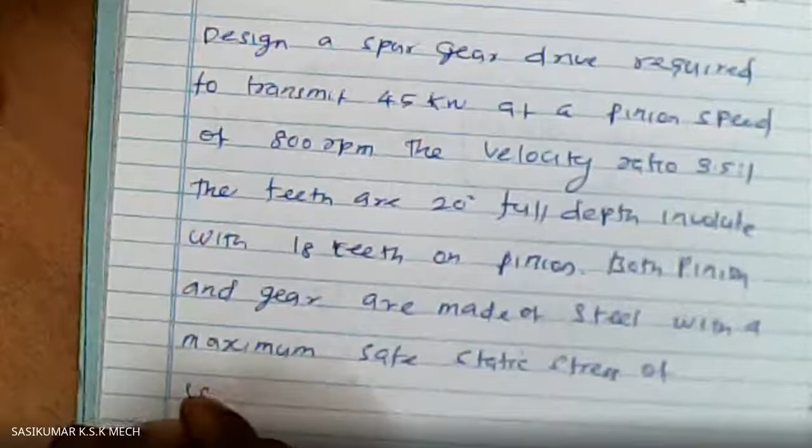Both pinion and gear are made of steel with a maximum safe static stress of 180 Newton per mm square. So this you can solve either by the previous method or this method also. So if specifically asked, you can use that method. Otherwise, whichever is convenient to you, you can use that.

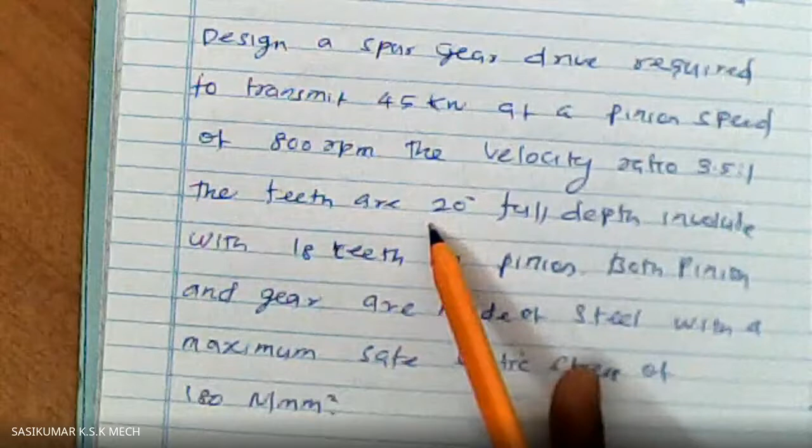So the problem is like this: design a Spur gear drive required to transmit 45 kilowatt at a pinion speed of 800 rpm. The velocity ratio is 3.5 is to 1. The teeth are 20-degree full depth involute with 18 teeth on the pinion. Both pinion and gear are made up of steel with a maximum safe static stress of 180 Newton per mm square.

Here both wheel and pinion and gear are made up of the same material.

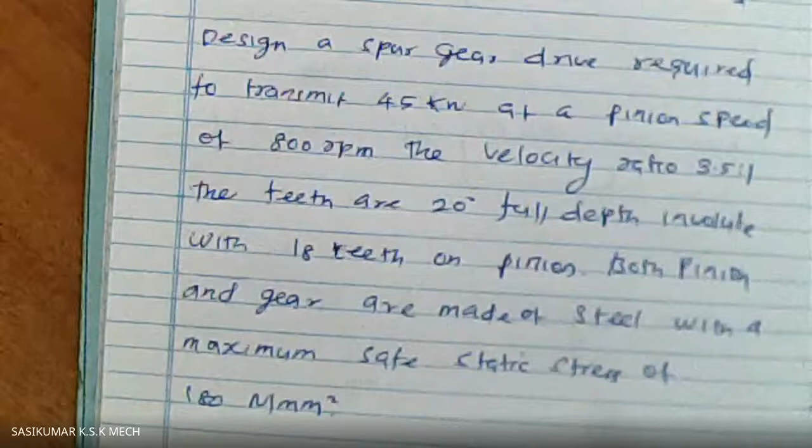So first of all, we'll write the given thing. So, given data.

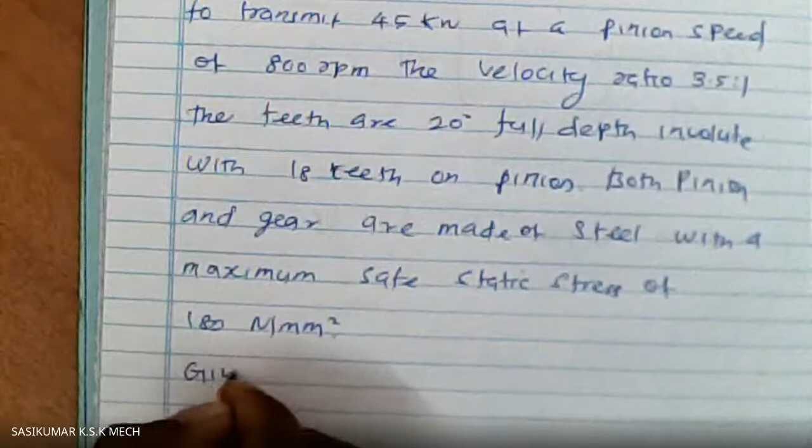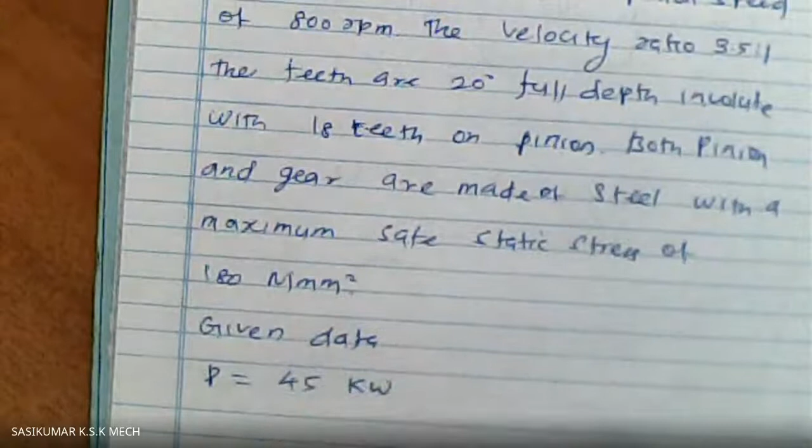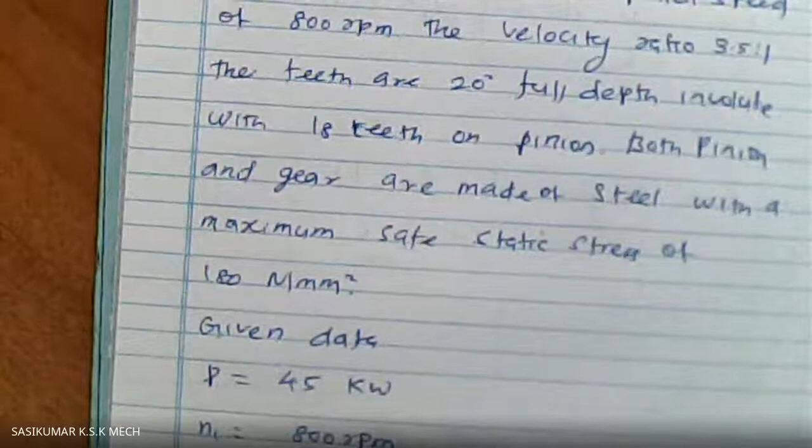First, the power that needs to be transmitted is 45 kilowatt, and the pinion speed - let us have the pinion speed as N1 - that is 800 rpm. And velocity ratio I, we know that is 3.5 is to 1, that is equal to 3.5. So the speed is going to be reduced by 3.5, that you know.

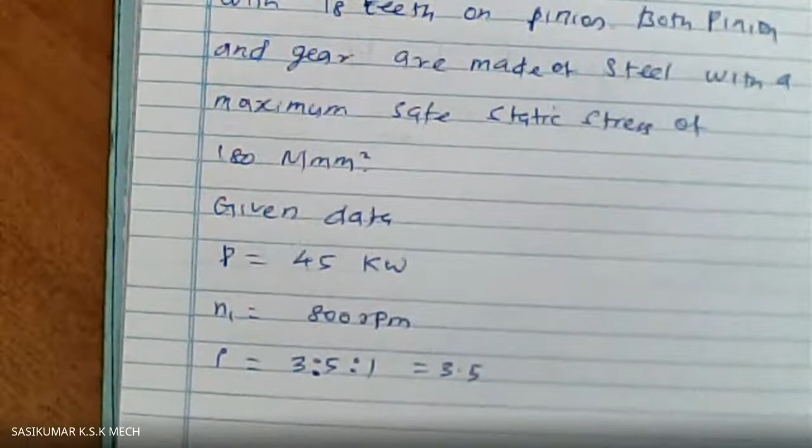So then what else is given? Pressure angle, that is represented as alpha, that is 20 degree. So power to be transmitted is 45 kilowatt, speed of the pinion is 800 rpm, speed ratio is 3.5, and the pressure angle is 20 degree full depth.

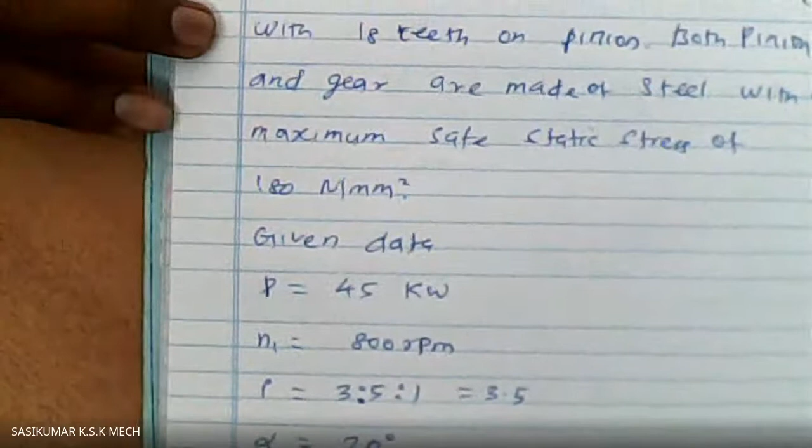So the other data given are these things. So the next data given are number of teeth on pinion. Let us have it as Z1, that is 18 teeth, and stress for both pinion and gear are 180 Newton per mm square. Sigma is 180 Newton per mm square.

So as usual, the first step is the selection of the material, but here they have given the material for both the pinion and wheel as steel. So selection of material for pinion and wheel is steel. So the grade we need not bother about it because the stress has been given already.

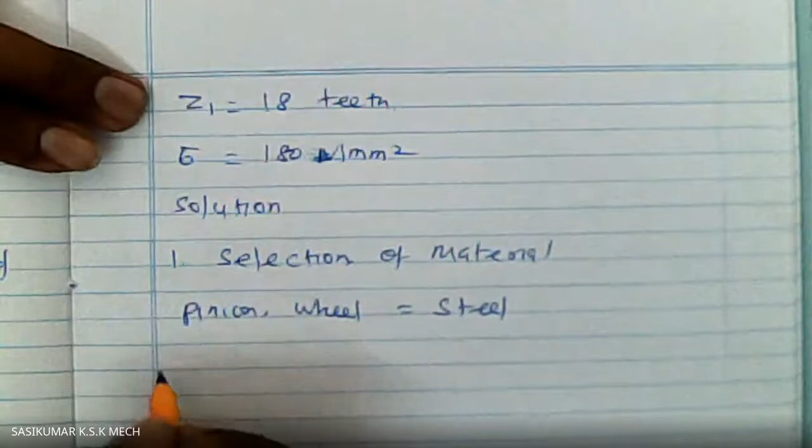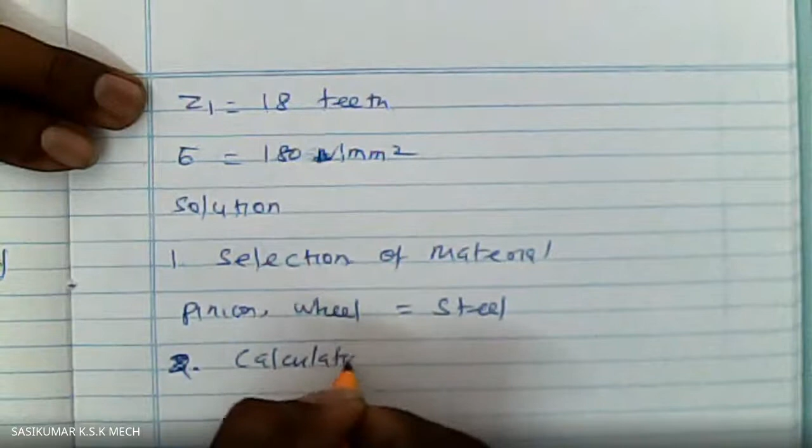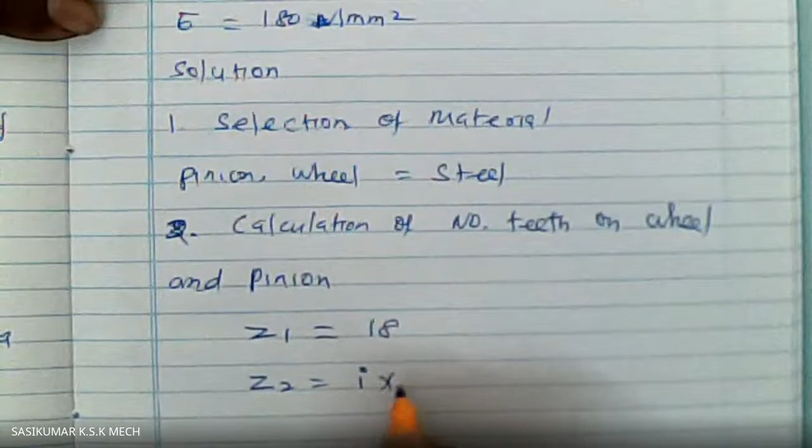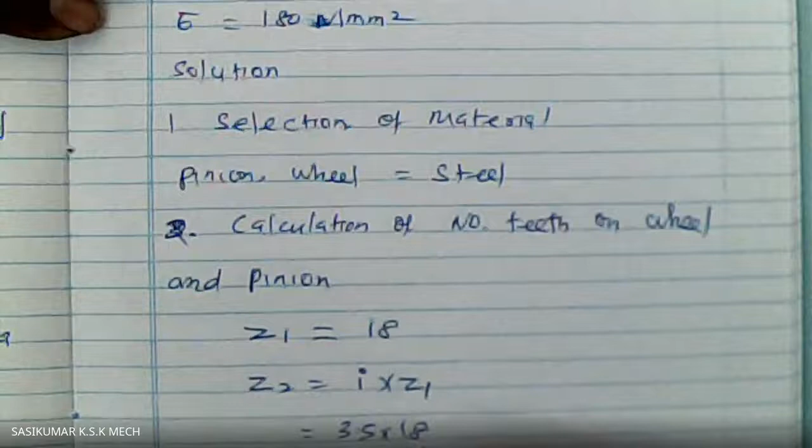So the second step in this method is the calculation of number of teeth on pinion and wheel. So Z1 is the number of teeth on pinion. We know that it is nothing but given in the problem, so Z1 is 18. For Z2, we know the relation I into Z1. So I is 3.5, Z1 is 18, so this will be 63 teeth. So 18 teeth and 63 teeth are the number of teeth on pinion and wheel.

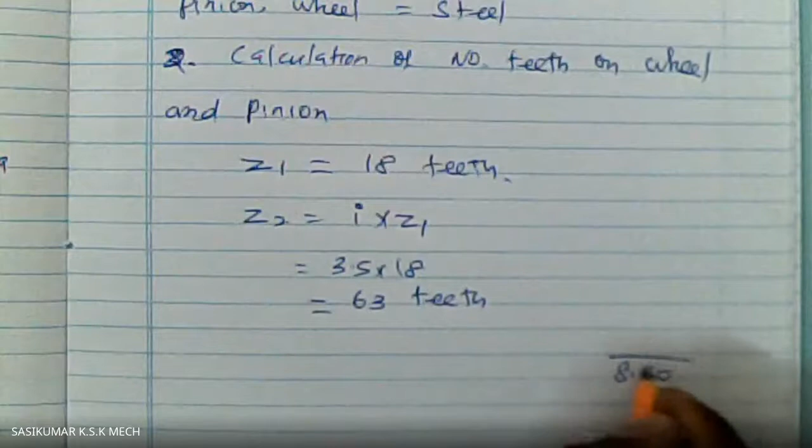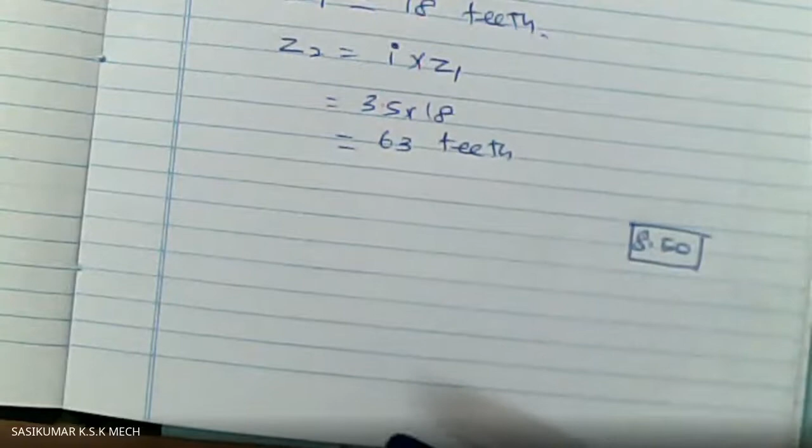So here next we should find a force called as tangential force or tangential load. For these kind of relations, you may refer page number 8.50. So from page number 8.50, you have the relations for these things.

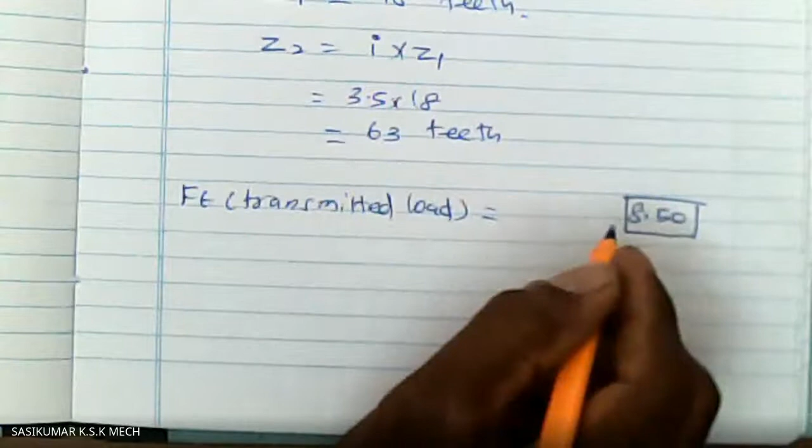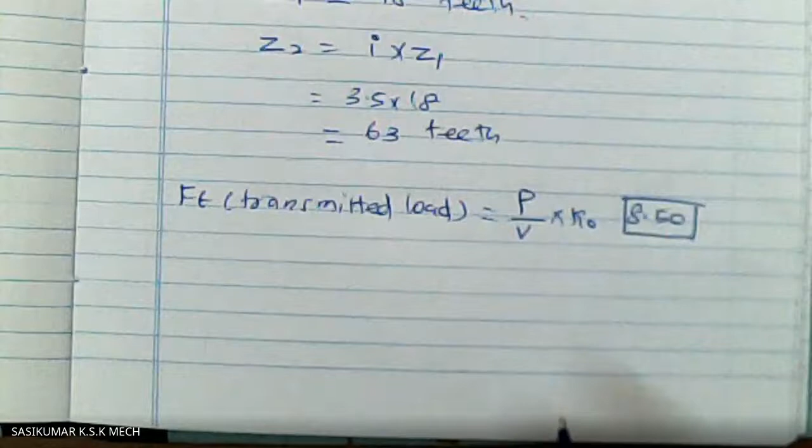So first, what we are going to find is the FT. FT is nothing but transmitted load, that we need to find. So this relation is available on page number 8.50. That is nothing but power divided by velocity into a factor called service factor. Here the service factor is assumed.

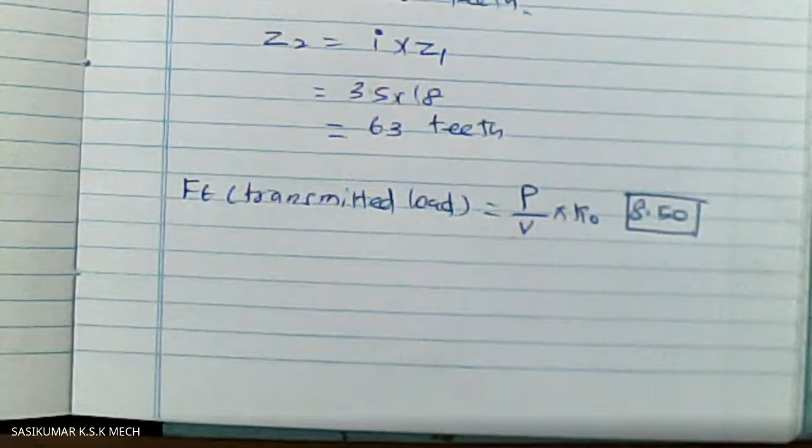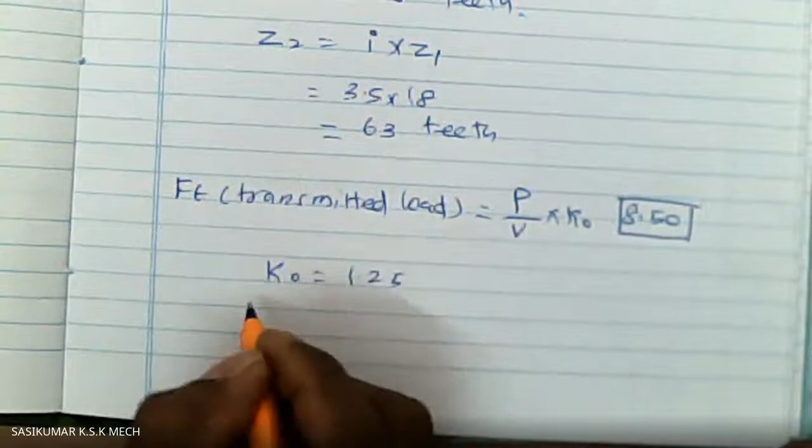So here I am assuming the service factor as 1.25. Power, that is nothing but 45 kilowatt, 45 into 10 to the power of 3 watt.

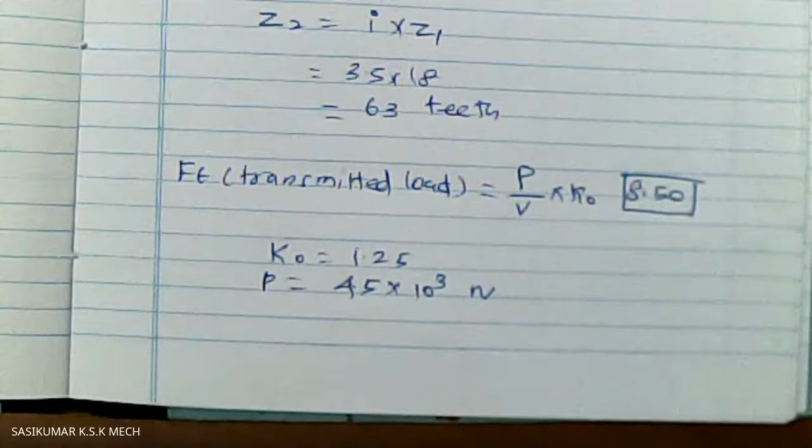And you need to find out the velocity of that pinion. Though the material for pinion and wheel are same, you should concentrate on the design of pinion, because the pinion is going to rotate for more number of cycles than the wheel, that you know. So as far as the design of gears are concerned, the design should be based on the pinion. So if pinion is safe, by default the gear will also be safe. So you need to find out the velocity. So the velocity relation is simply pi d n divided by 60.

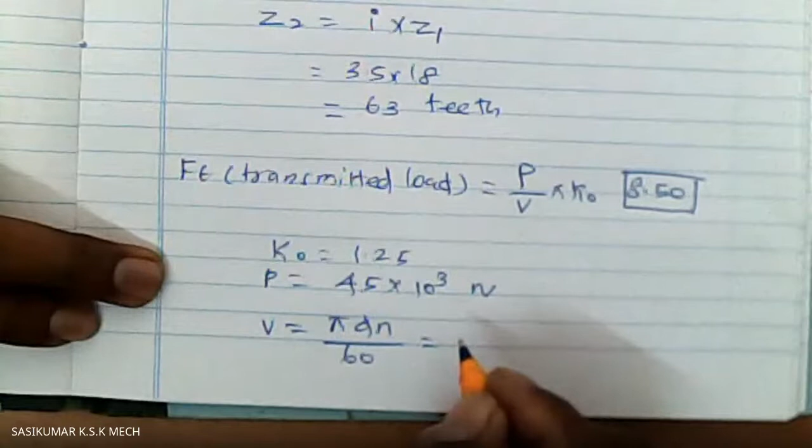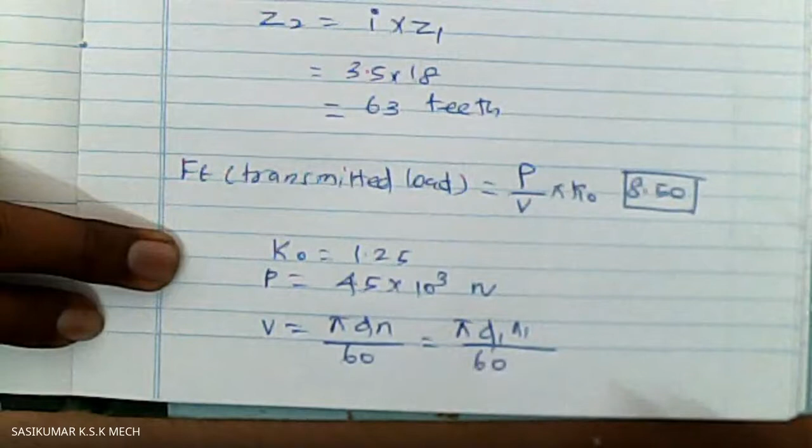So here we are going to find out the velocity of pinion. So the relation can be written like this: pi d1 n1 divided by 60. Here you don't know the diameter of the pinion. So the diameter of the pinion is not known now.

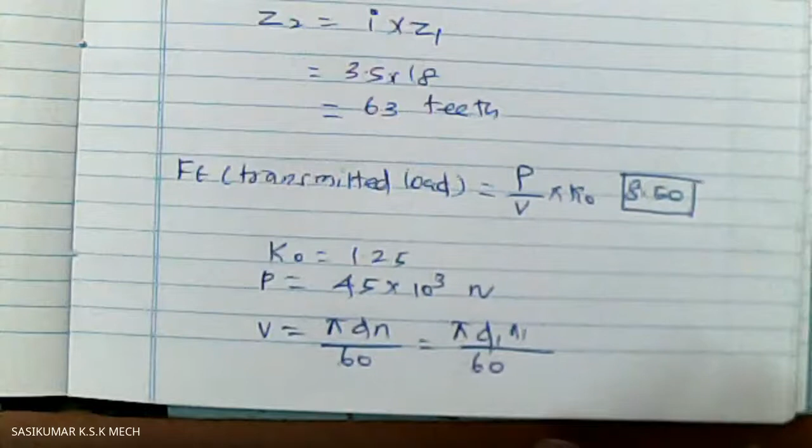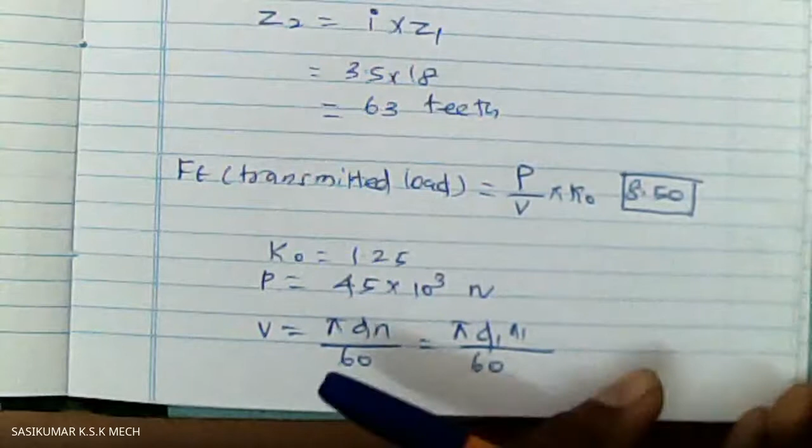No, the diameter can be determined, isn't it? So the diameter is nothing but m into z. So in terms of module we should keep this. So diameter is not known now, but we can keep this in terms of m. Let us see how it is possible.

So we know a relation called diameter equal to m into z. This you know already. So for d1, m into z1, this also you know. So we'll keep m as unknown, because we are going to find out the module. Z1 we know, that is nothing but 18.

So v is equal to pi d1 n1 divided by 60. So here pi d1, m into 18, into speed. What is the speed? The speed is 800 rpm. So let us have this as such. So this will be around 0.754 of m meter per second. So you should not get confused with this m and this m. This is the module and this is the velocity unit.

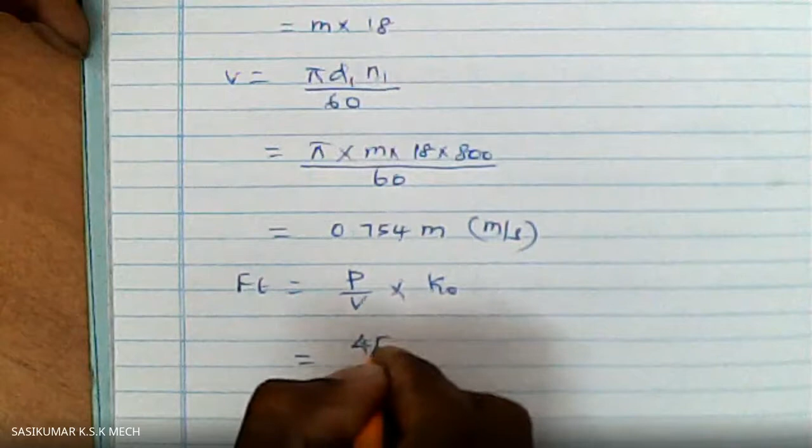So K naught we assumed as 1.25. Now we will find the transmitted load Ft. That is nothing but P by v into K naught. After substituting P as 45 into 10 to the power of 3 divided by velocity 0.754 of m, into K naught as 1.25, let us have this as the force transmitted Ft as 74603 divided by m. This is the force transmitted.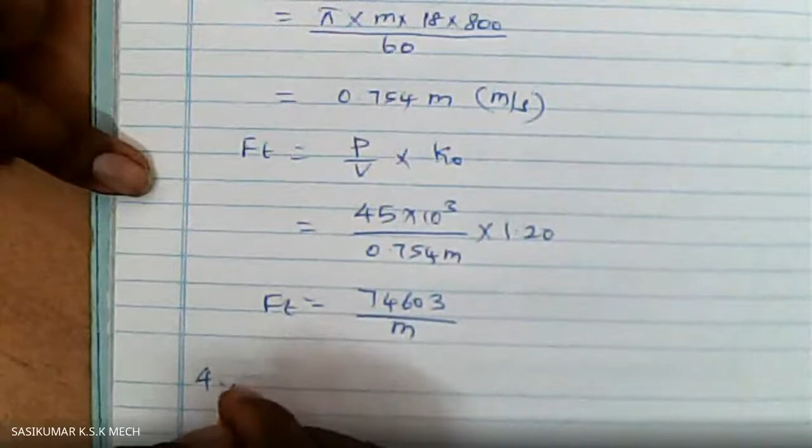Ft, and we will find out the dynamic load in the next step. So, dynamic load, initial dynamic load FD. For this also all the relations are available in page number 8.50. FD is nothing but FD is equal to FT into CV. So this relation is available in this way. So FT from the previous step, CV is a factor.

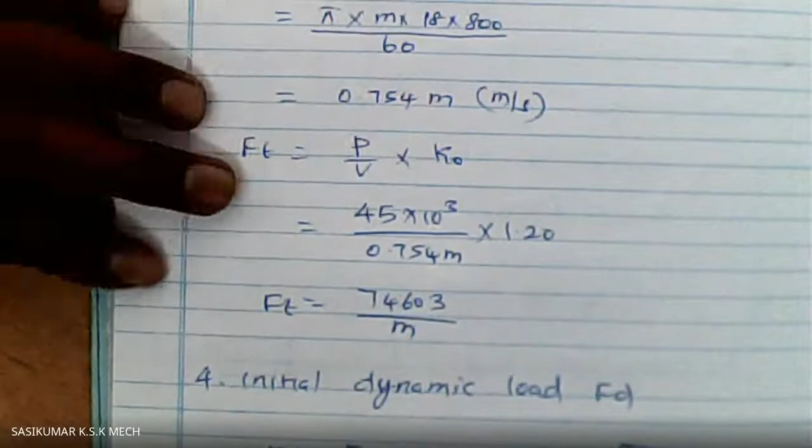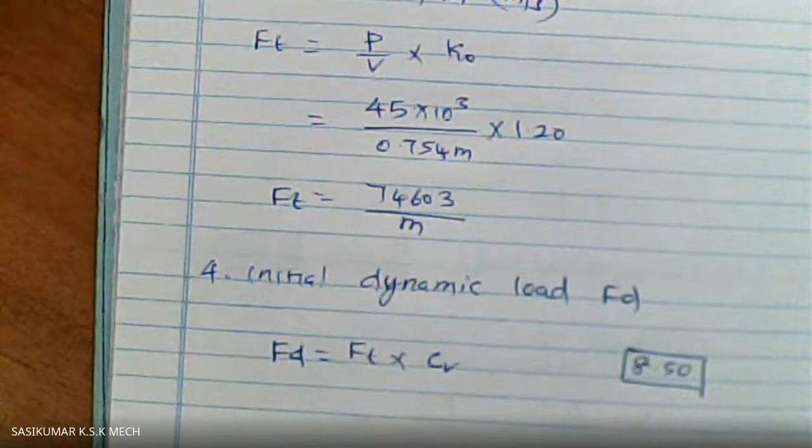I think you have written. So FD is equal to FT into CV. This relation is available in page number 8.50. Now we'll find out CV. CV is a factor. So I am assuming CV as 6 plus Vm divided by 6. This is available in page number 8.51, you can refer this.

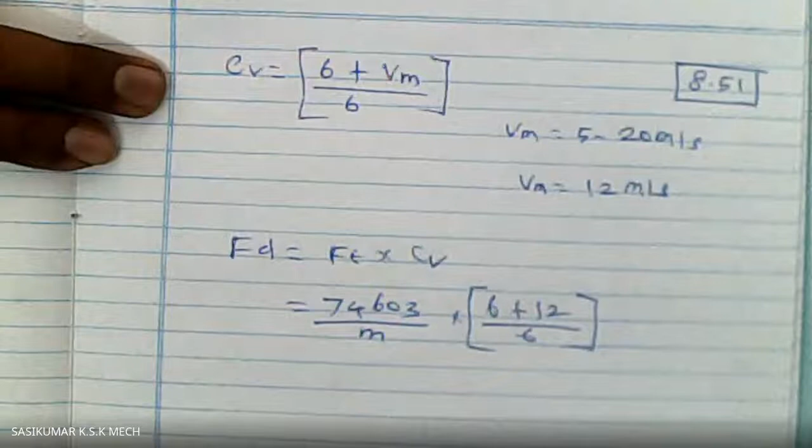Here Vm is assumed as 12 meter per second, for this relation is for Vm 5 to 20 meter per second. So I am assuming my Vm as 12 meter per second, as the initial assumption. Finally we will find the corrected one. Now the dynamic load FD is nothing but Ft into Cv. Here Ft is from the previous step, 74603 divided by m, into Cv, 6 plus 12 meter per second divided by 6. If you calculate this is coming around 223,809 divided by m, M is the module.

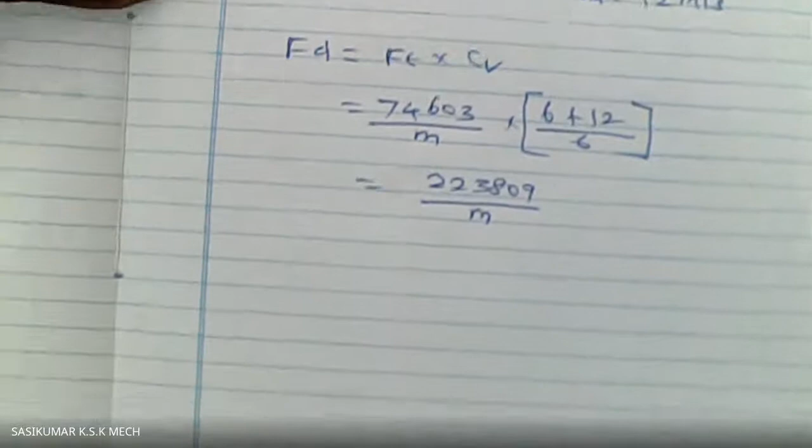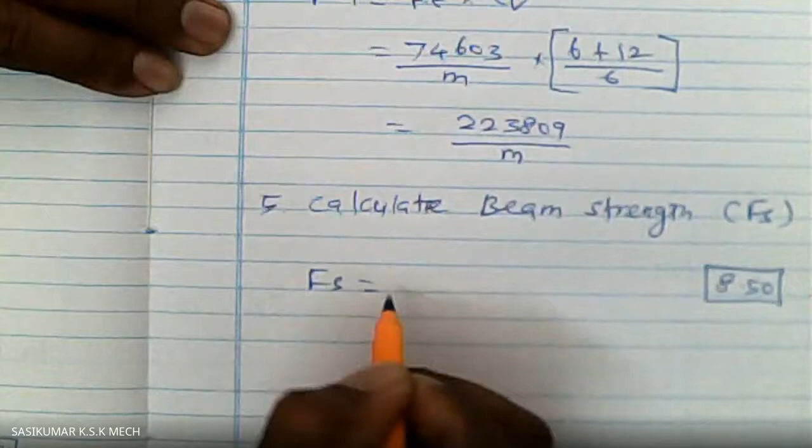Now we'll find out the beam strength. The next step is to calculate beam strength, Fs. For beam strength, you have the relation on page number 8.50. Beam strength Fs is nothing but pi m b within the bracket sigma b into y.

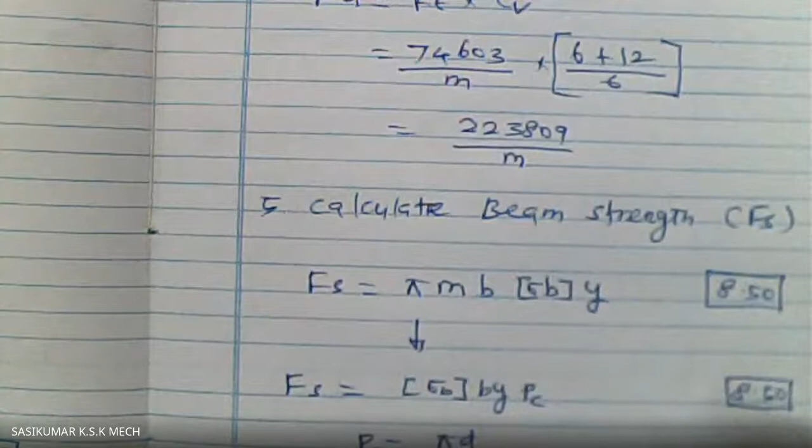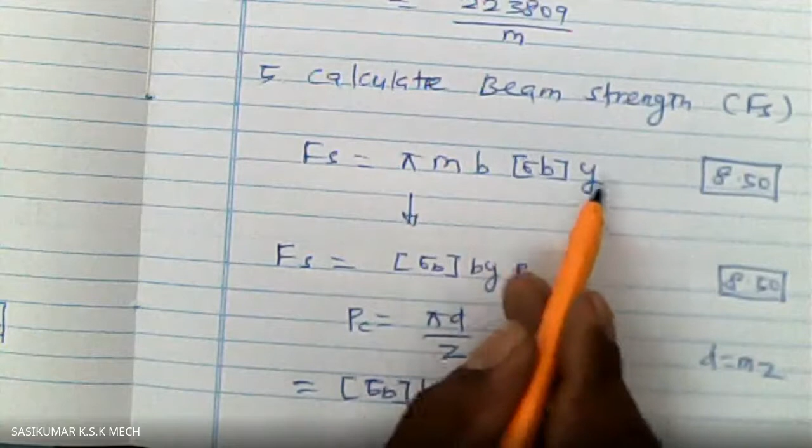So this relation has certain modification. In your data book, it is given as sigma b b y into PC. Here for PC, on the same page, this is available in page number 8.50. PC is nothing but pi d by z. So here I am rearranging this like this. We know that d equal to m into z. That thing you know. So after substituting this in the above equation, sigma b by pi m z by z. So this will get cancelled. Then you have this relation pi m b sigma b into y. So this is how we arrived at this relation.

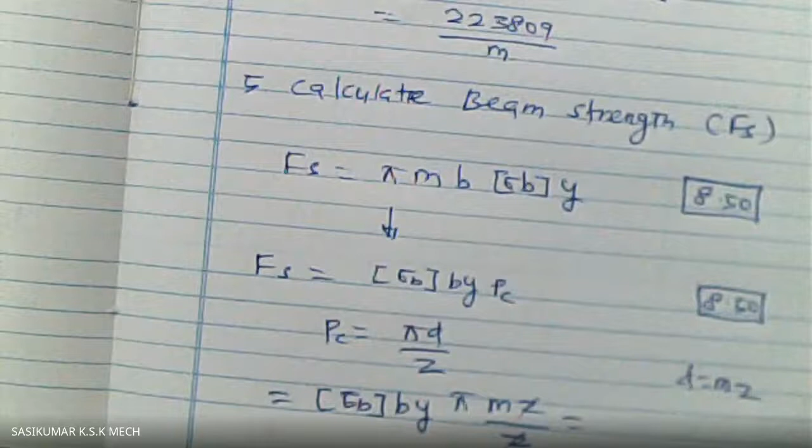So now form factor. I think you are clear with this one.

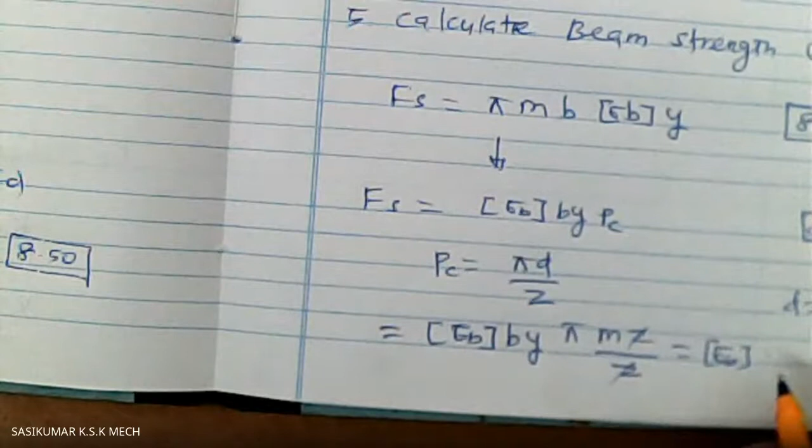So this is how we arrived at this relation: sigma b into pi m b y.

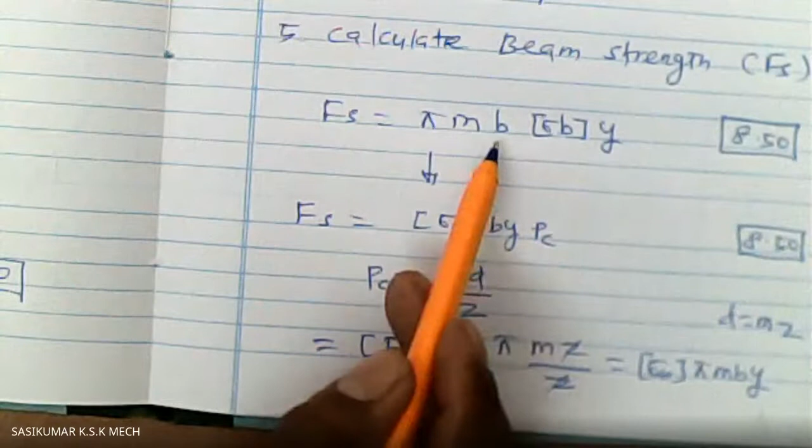Now we'll find out pi is a constant, m is the module, b is the face width. Sigma b is the stress given in the problem. Y is the form factor. For b, b is nothing but the face width.

It is assumed as 10 times the module. From the previous relation we know b is assumed as 10 times the module. So the other things are known. The form factor y can be determined from this relation.

The relation is 0.154 minus 0.912 divided by z. This relation is available on page number 8.50. For this form factor, the relation is available. So 0.154 minus 0.912, number of teeth is 18, so this is coming as...

I think it is around 0.308. You may check it in the later part. So now you have all the data.

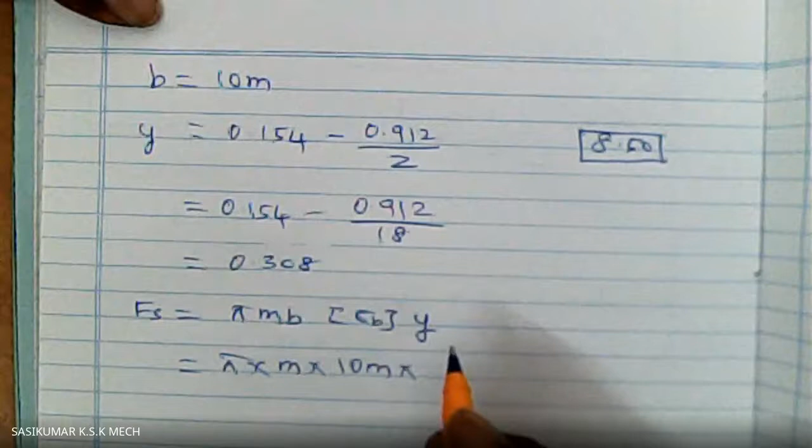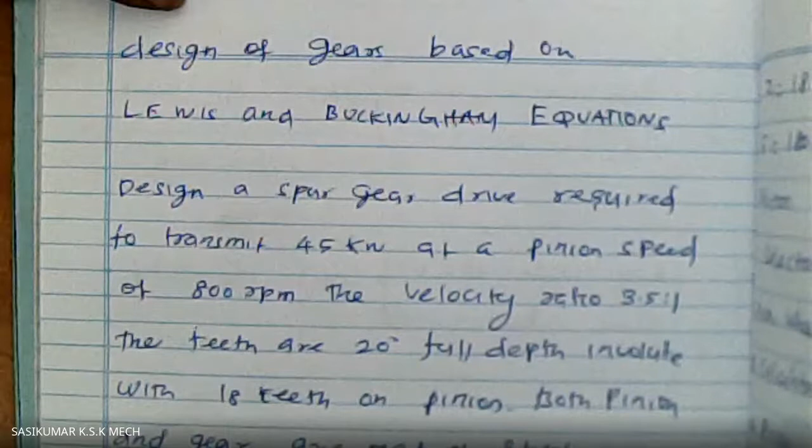So that is given as 180 Newton per mm square. Let us change this into Newton per meter square, or you may keep it as such.

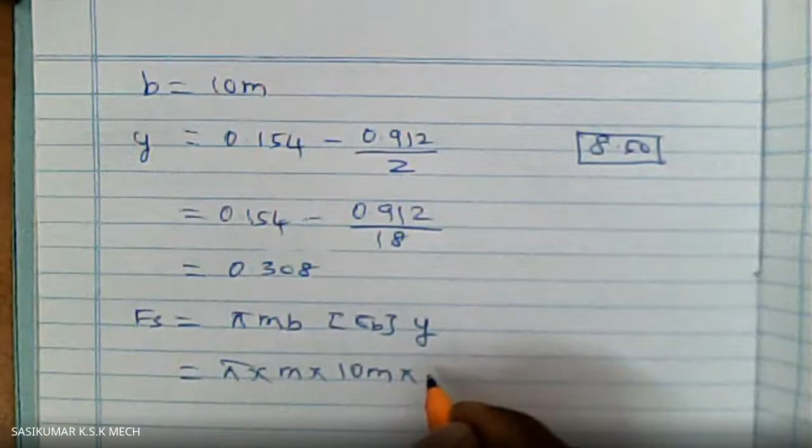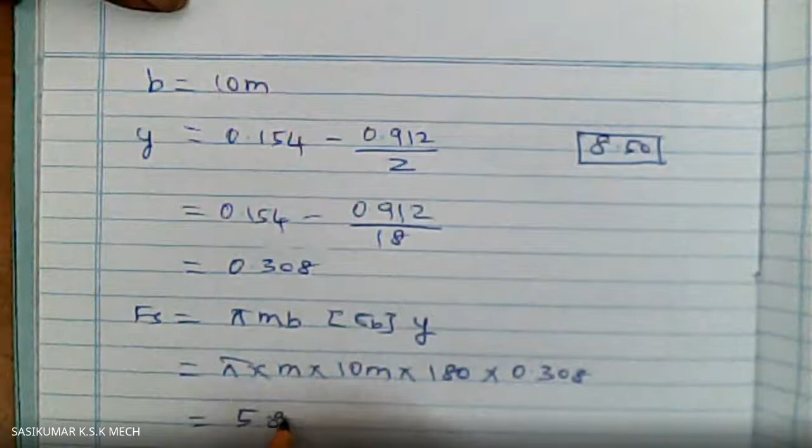So this is 180 into form factor 0.308. Around, this is coming as, in terms of m, 584.15 m square.

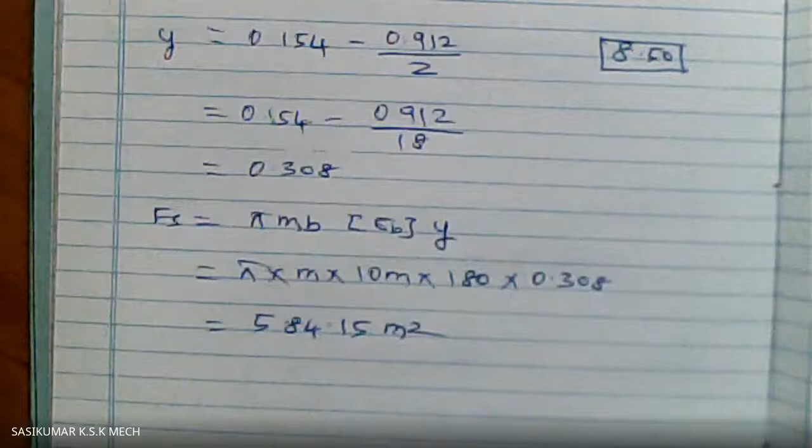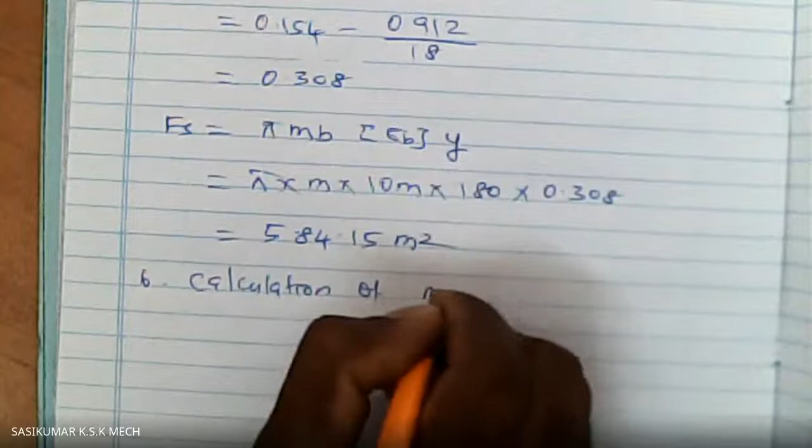Now you need to calculate the module based on the beam strength. So the next step is the calculation of module M.

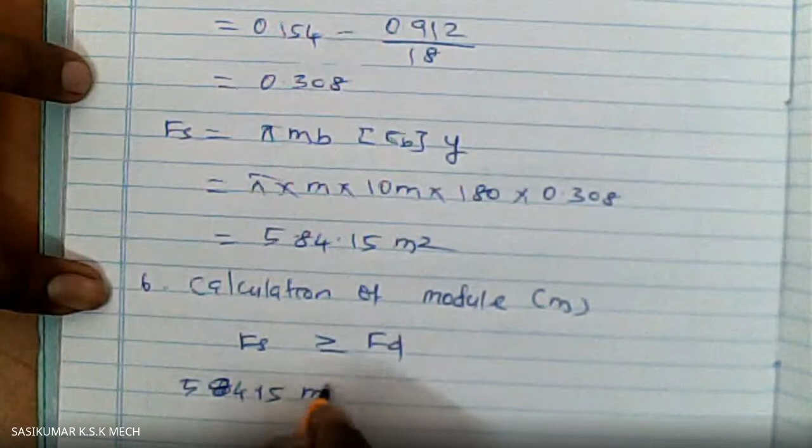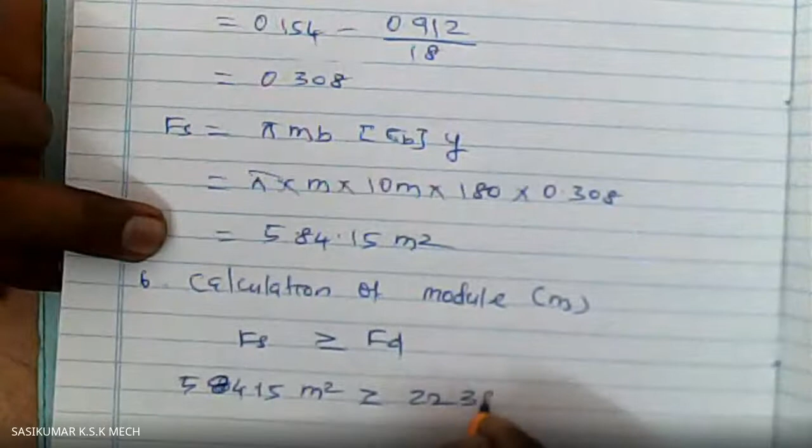So in general, this Fs beam strength should be greater than or equal to the dynamic load Fd. So now you have Fs as 584.15 m square greater than or equal to Fd, which is around 223809 by m.

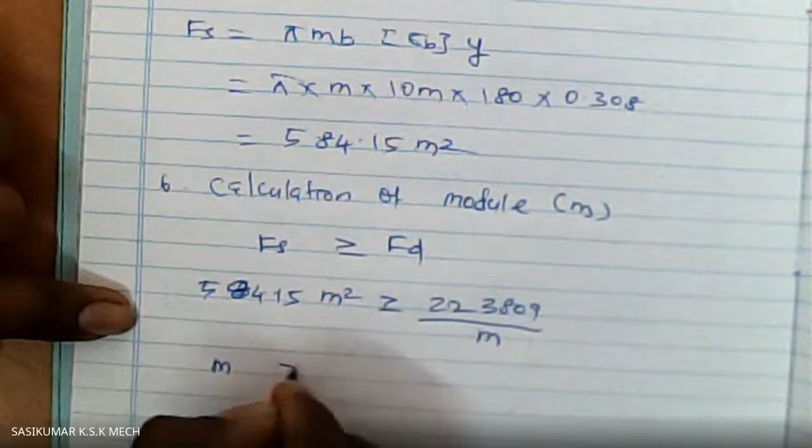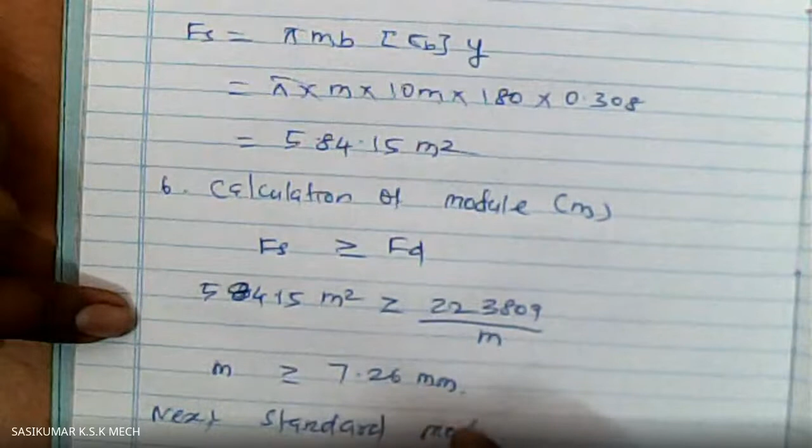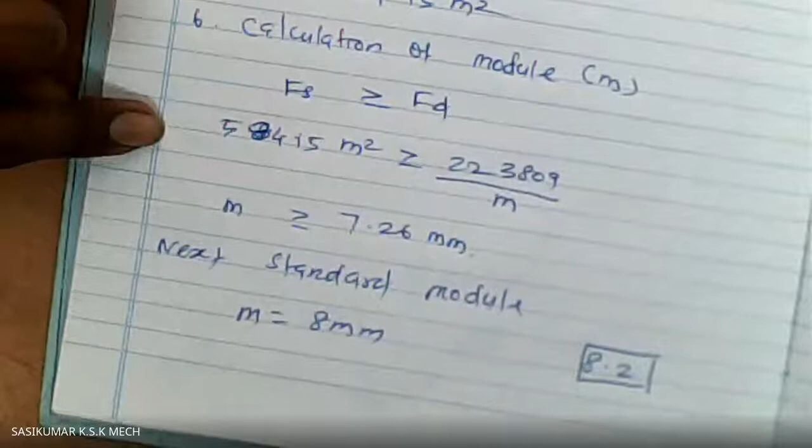After solving this, you have m greater than or equal to 7.26 mm. So the next standard module m is 8 mm. This is from page number 8.2, from which we can standardize this module.

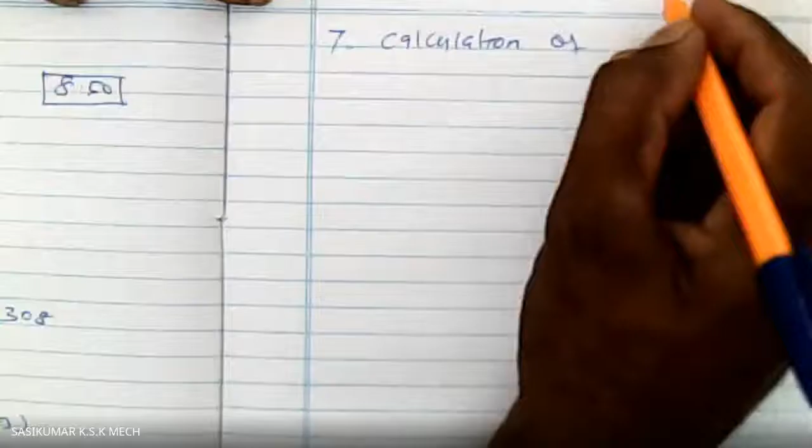Next step: calculation of actual diameter and velocity and all. Calculation of b, face width, diameter of pinion, and velocity. So b is taken as 10 times the module.

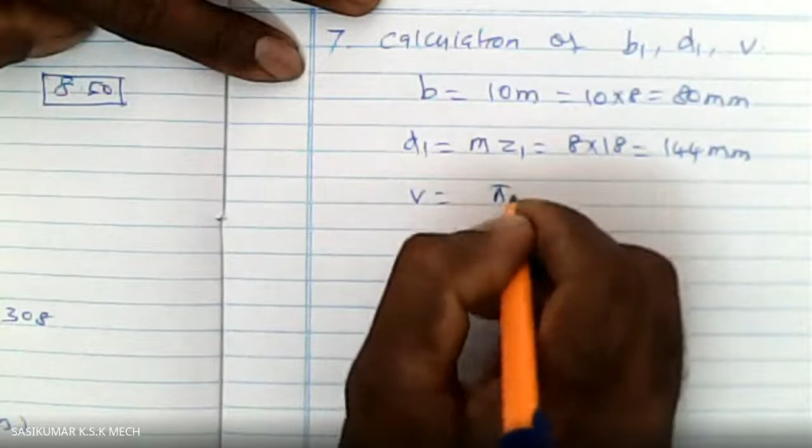So here, 10 into 8 is 80 mm, and diameter of the pinion d1 is m into z1. So m is 8, z1 is 18, giving 144 mm, and velocity of the pinion is pi d1 n1 divided by 60. So pi d1 is 144, n1 is...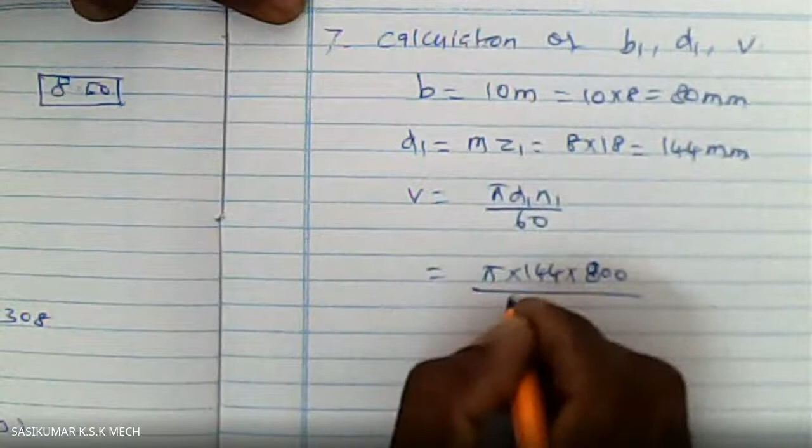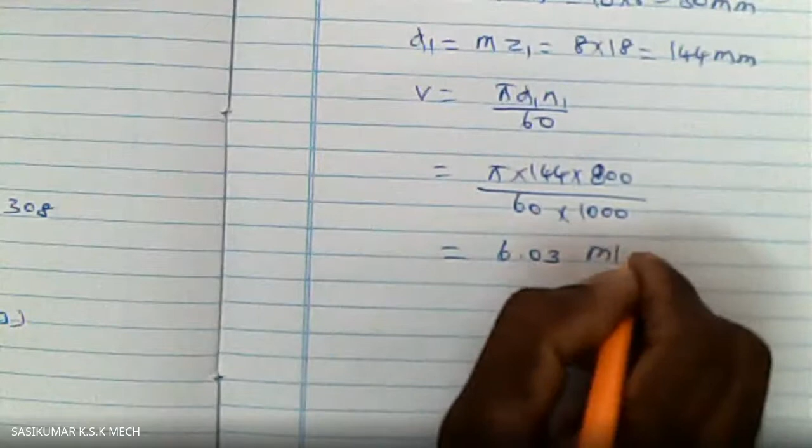N1 is 800 rpm, divided by 60 into 1000 because this is in mm. So now the velocity is 6.03 meter per second. But the factor CV was obtained assuming the velocity as 12 meter per second, or the range was 5 to 20, so we were taking it as 12 meter per second. So now the actual velocity is 6 meter per second.

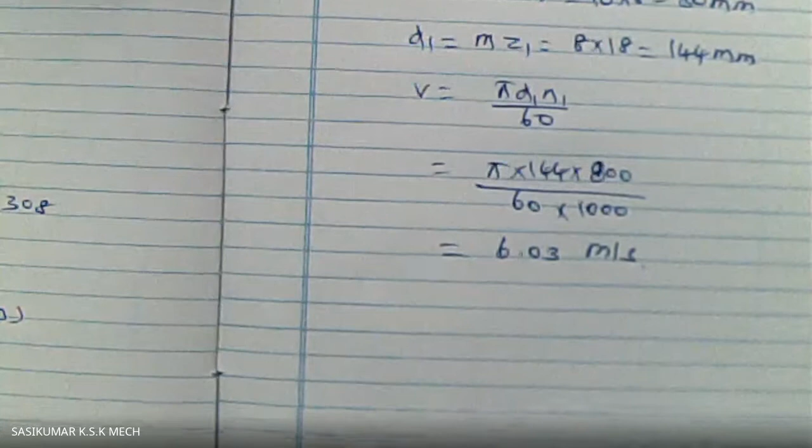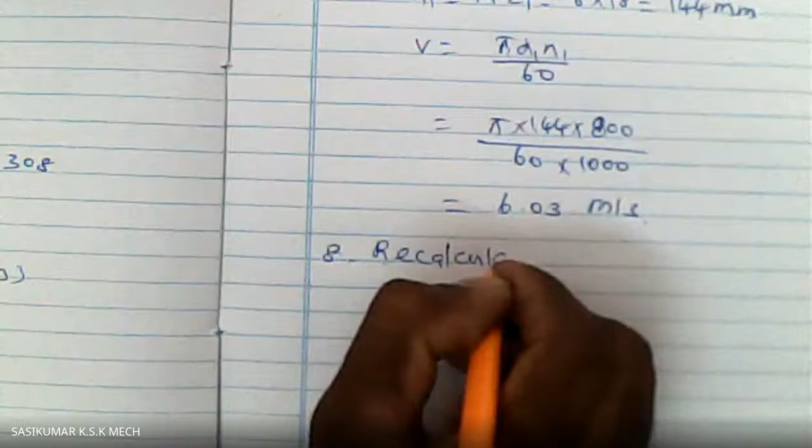Now we'll calculate the beam strength once again based on the above values. So we will do recalculation of beam strength based on the actual values.

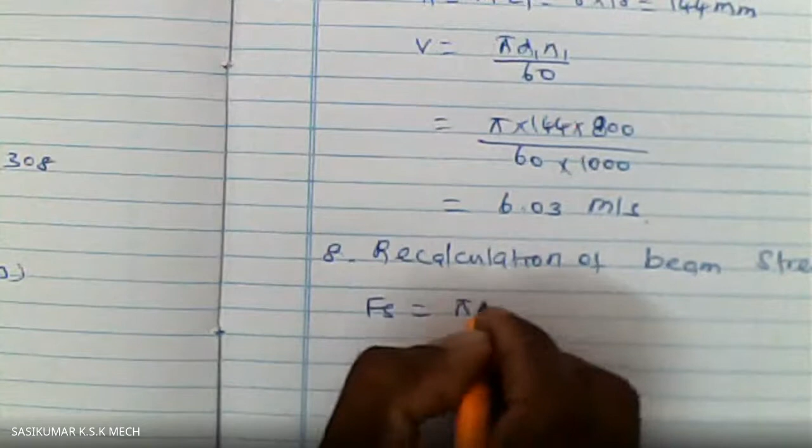So Fs is equal to pi m b sigma b into y. After substituting, for this you need to find y. We'll substitute it there itself.

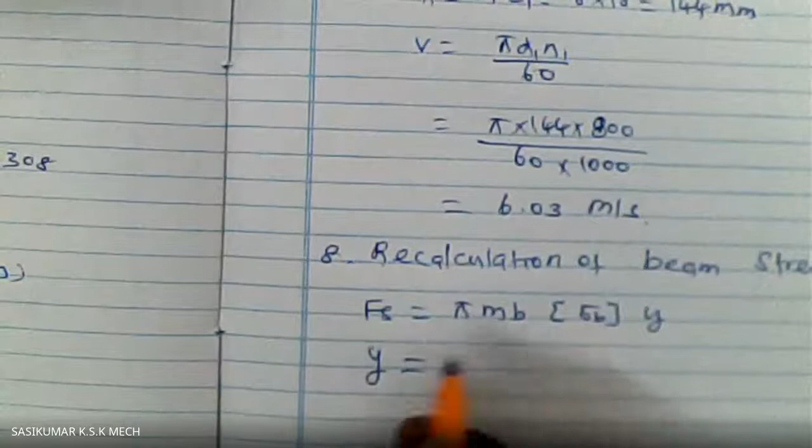Pi m is 8, beam's face width is 80, into 180 Newton per mm square. Y is the factor, that is 0.154 minus 0.912 divided by 18.

So on solving this, the beam strength is coming as 37385.45 Newton.

So you have some more steps. Let us stop here and we'll continue from the next class.